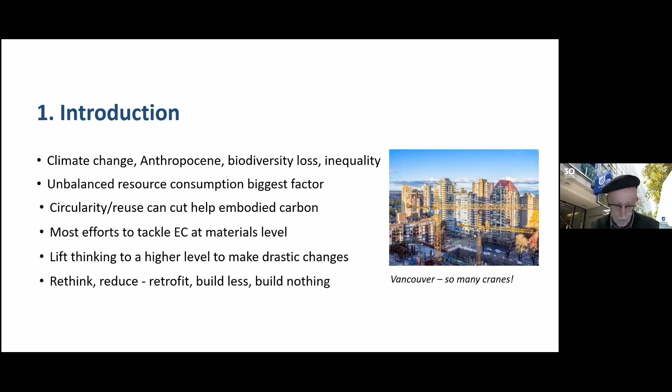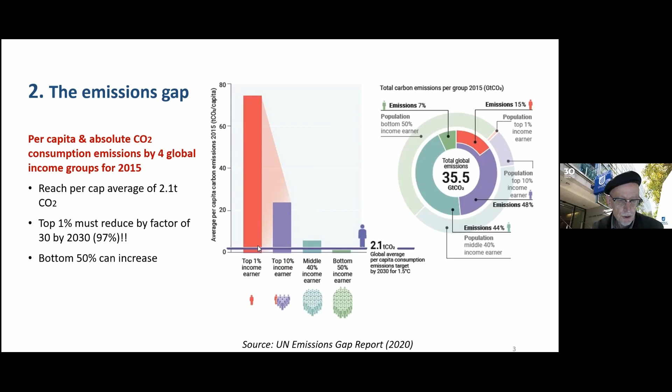And going on the left, the diagram on the left shows how much we will reduce consumption-based carbon by 2030 for a 1.5 degrees centigrade rise. In red, the wealthiest 1% of the population must reduce their consumption emissions by a factor of 30, which is a staggering 97%, to get to this baseline, a per capita global average consumption target. So you can see the red has to go right down, 97% reduction.

That 1% is not just the super rich, it's actually many of us. Most of Australia, or many people in Australia, fall into that category. Similarly, you can see for the top 10%, they also have to make a big reduction. And all this will enable poorer societies, particularly the bottom 50%, to increase their emissions because they need more infrastructure and facilities.

But turning to the built environment and embodied carbon, it's already been mentioned about the importance of buildings and infrastructure in terms of consumption of resources and waste and emissions. And it's the most important sector.

To meet a net zero carbon goal, the Global Alliance for Buildings and Construction reports that we are not on track either, largely due to growth in floor area, which surpasses energy efficiency improvements. This requires a 60 to 70% reduction in carbon by 2030, less than 9 years away. But similar to the UN diagram, arguably more should be achieved in wealthier societies. Attention is now turning, as has been mentioned, to consumption-based emissions, including embodied.

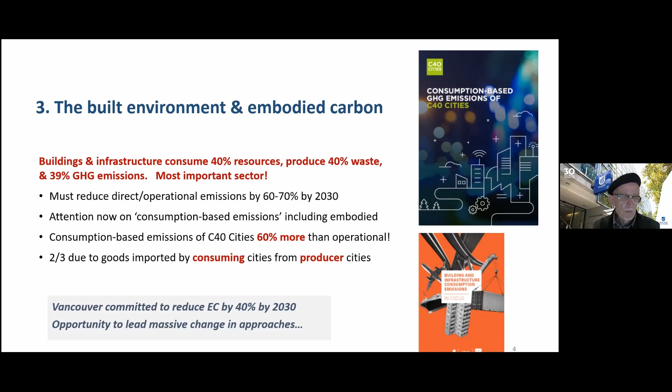The circular economy is closely related to the concept of eco or resource efficiency, which has been around for a very long time, where more services or prosperity could be gained from less resources, more from less. It was put forward as an alternative to the linear economy that involves take, make, and waste. These days, it is seen as gaining more value from goods and products by extending their useful life and keeping them in closed loops, especially by their reuse.

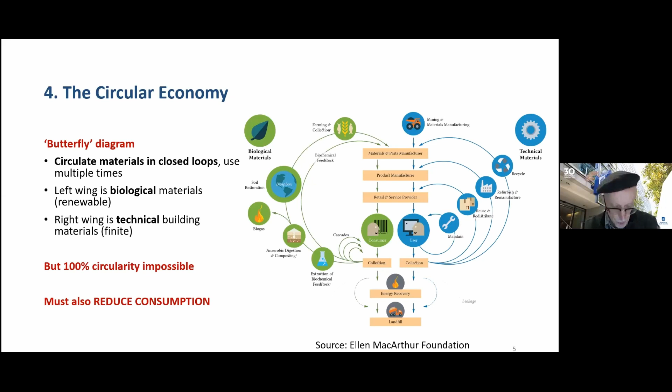Adapting the circular economy to the built environment. Benjamin has already mentioned some of this, but I'll just quickly go over it. I was attracted to the notion of resource efficiency and circular economy in the early 2000s.

I conducted research with Interface Floor and Hewlett-Packard on reuse of their products, especially in modular form, which is when I first encountered the idea, which Benjamin's also mentioned, of a service economy—providing products as a service, which facilitated their take back and reuse. Now, there are several key principles, which I've highlighted here.

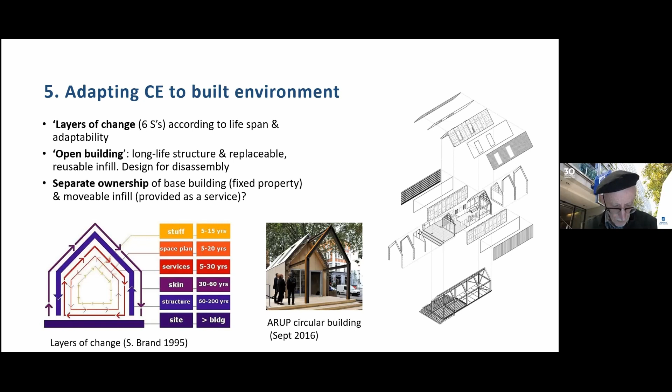Digitally enabled reuse of building components. As an architect, I was most interested in the application of these concepts to the built environment. This led me to be awarded the Arup 2017 Global Research Challenge to adapt the circular economy to the built environment.

This involved adapting a lot of actually existing technologies, including BIM, which has been mentioned, and RFID tags, which you have on your luggage. Our UniSA and Arup team succeeded in establishing a cyber physical connection.

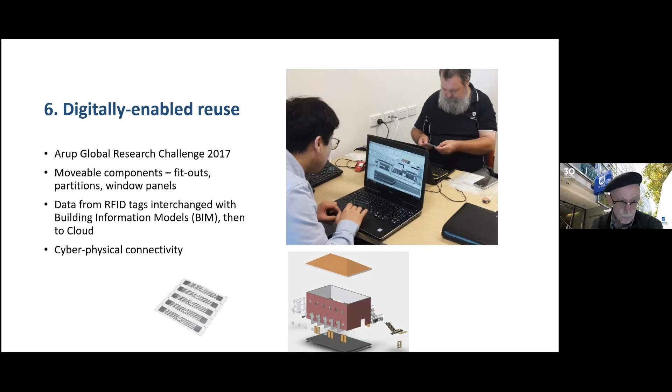This thing could be managed and monitored remotely and exchanged between various users. So this led to us establishing a prototype. It's only a prototype, but we proved this could all work - a prototype Cloud-BIM platform for reuse of components as a service.

The most interesting part of this was the idea of providing components via service contracts, whereby the supplier maintains ownership and stewardship responsibilities over their life, quite similar to rental or leasing.

We explored the feasibility of this approach, especially with a supplier of glazed framed window panels. This revealed that there are some barriers needed to be overcome, such as establishing a market, where most of the market is for new products, and providing products as a service. There's a need to amortize the initial manufacturing cost over time, and also there's a great need for increased modularization and standardization.

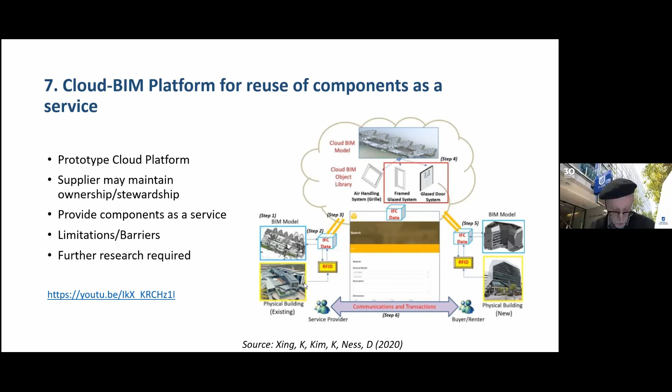But as I said, we still need to take that previous work further and find support and investment. So please let me know if you're interested. For example, we need to link with smart sensors, which have the potential to enable online real-time management and monitoring of the condition and performance of assets.

But after all that work with the Arup project, which was based on reuse, I realised that circularity and reuse is not enough to meet the global targets, especially when demand and consumption increases. While reuse is positive, we must also lift our sights to reduce and reconsider or rethink.

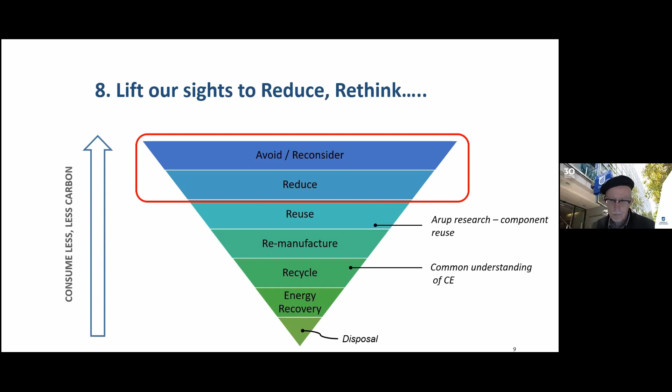Which leads me to emphasise that we need to concentrate on building less, as has been mentioned, maximising the use of existing assets, and also build nothing, as Hannah also mentioned, where if we build nothing and find alternative approaches, then we can get 100% saving.

So this includes questioning the need to build at all, the build nothing option. Some researchers, such as Professor Julian Allwood of Cambridge University, have urged more questioning of demand. He wrote, 'Reducing service demand is the gold medal of modern materials management.'

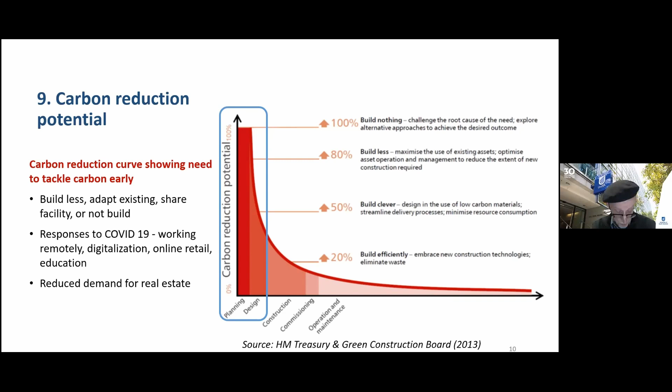So we need to build less new to cut most carbon. Question mark, do we? I think we do.

And in North America, Bill Gates wrote on his blog that buildings are bad for the climate, and he actually mentioned embodied carbon. But at the same time, Microsoft was constructing its new headquarters in Washington with 17 new buildings totaling 6.7 million square feet. So I hope you get the picture.

In my city, Adelaide, I won't go into that, but we're also continuing to build big, although our population growth is very low, and we should not be. We should be reusing the existing stock, and there's a huge vacancy rate.

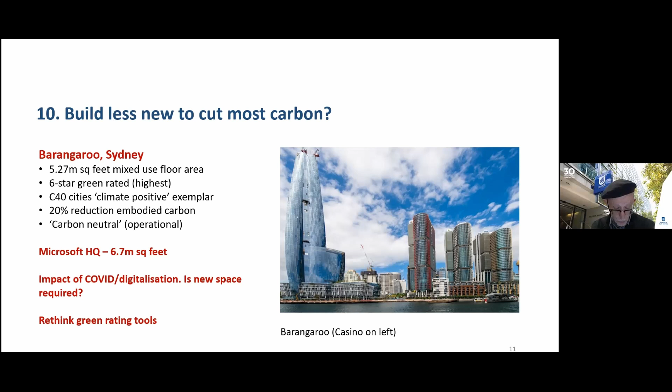So, some takeaway messages. Digitally enabled reuse, such as by the Arup project, can save around 40 to 50% carbon, I believe. But more is required - reduce and rethink can save 80 to 100%.

So we need to challenge the need, build less, and find other ways to achieve outcomes. COVID-19 digitalisation has shown what's possible, with remote work leading to less need for real estate.

And going back to what I was saying before about equity, we need to shrink new builds in wealthier societies so that the disadvantaged parts of the world can grow their services and infrastructure. And finally, we need to rethink rating tools.

Vancouver's aim to cut 40% carbon by 2030 is admirable. Reuse is essential, but also I suggest rethink and reduce new floor space, regenerate and make better use of what we have.

And just a final remark - I read recently that world cities would add over 64 billion square feet of new floor space to their building stock every year, equivalent to adding an entire New York City to the planet every 34 days.